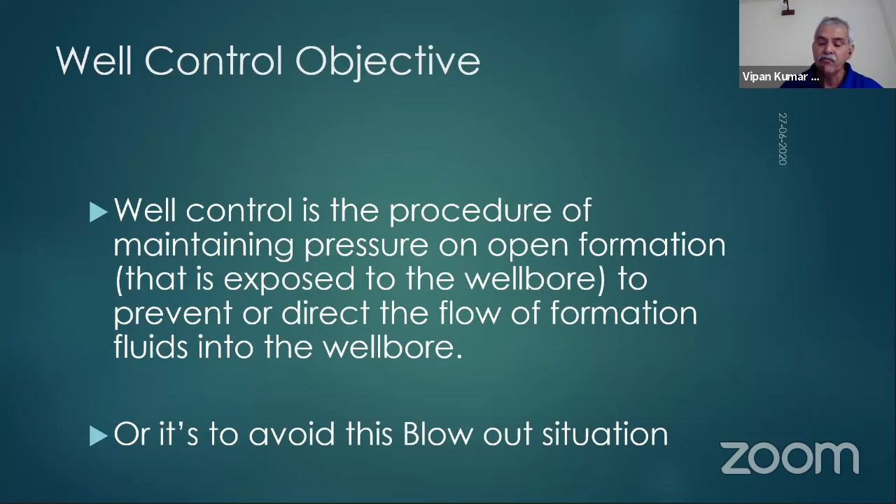Before I go into well control in detail, let us talk about well barriers. Why am I talking about well barriers in the beginning? Because if you see this particular case in Assam, what they were doing was actually a well intervention job. Much of you may not understand now, but just listen to what I'm saying. By the end of the program today, you'll be able to appreciate exactly what is happening there.

What was happening there was they had one zone active with BOP and wellhead installed on the well. They wanted to shift production from that particular target to some other object of interest. So what they did was put a cement plug on the object they didn't want production from. They put a cement plug there, and they had brine of the right weight in the well. So according to them, with brine in the well and a cement plug, they could go ahead and do some repair work on the wellhead.

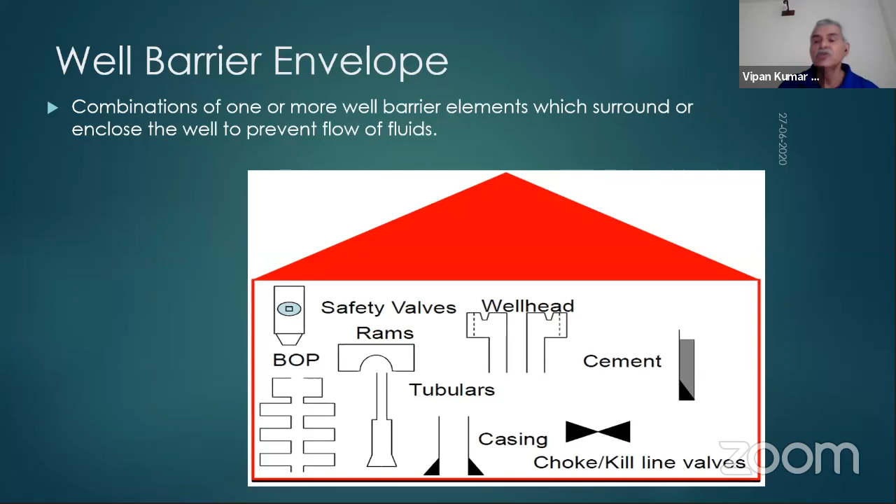So when we are drilling a formation, and as we drill further, we can encounter, particularly in exploratory wells, very high pressure zones. Now, when we are drilling, how will we encounter such high pressures? What will we do? Who will stop them? What stops them is the mud.

Other than doing the primary functions of taking the cuttings out of the well, cooling and lubricating the bit, suspending the cuttings when circulation is not happening, and giving corrosion resistance, these are all the work which the mud does. But also, very importantly, mud acts as a primary barrier.

Now, this mud, because of its hydrostatic head, doesn't allow the high pressures from the formations to come into the well. But this mud should be of the right mud weight. That is the point. So when we drill a well, from our graphs, from our pore pressure values, we should select the right mud weight so that we can effectively drill that well.

If the mud hydrostatic pressure in the well is more than the formation pressure, we are overbalanced, and that is what we should be. Our mud hydrostatic pressure should be more than the formation pressure, so that it can control formation fluid from coming in. This is an overbalance condition, and this is a wanted condition. It should be like that.

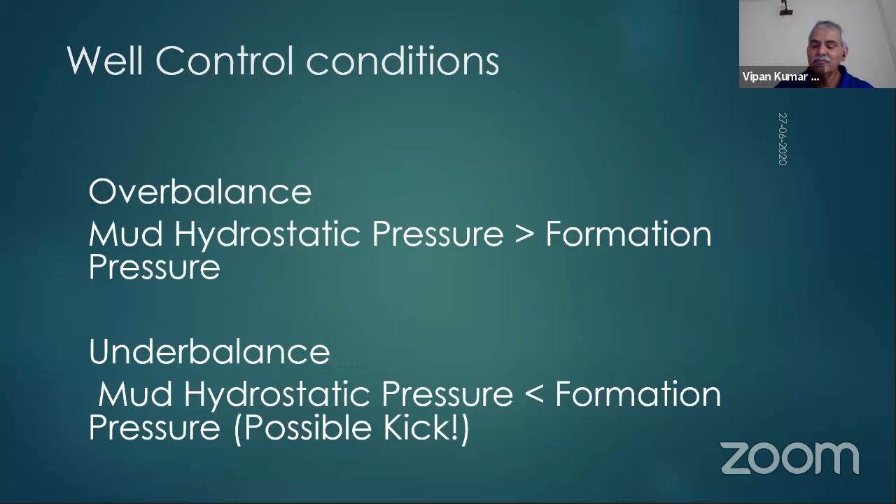Okay, once you have got a kick, suppose you have entered a high pressure zone. Suppose your prediction was that you are using, say, 15.8 ppg mud, that is what you anticipated. But suddenly you have come into a very, very high pressure, unexpected zone, which demands a much higher mud weight, which you were not anticipating. So naturally, some kick will come into the well.

Now, if the kick has come into the well, your next action will be to shut in the BOP. So now this BOP, which you will shut in when the kick comes, is your secondary well control. Primary was mud, which was handling everything. Somehow mud failed. Maybe the high pressure encountered was not anticipated, and your mud weight was less than required,

and formation fluids started entering the wellbore. Now formation fluids are entering the wellbore, the well is flowing. The action you should take, and people should be trained to take, is to close the BOP in as little time as possible. After the closure of the BOP, it becomes the secondary well control equipment acting on the well.

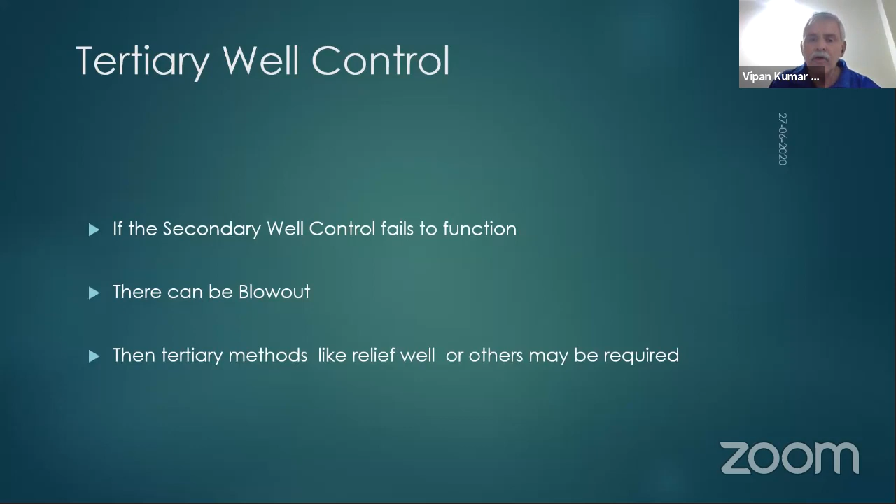Coming to our next slide. If formation fluid enters our borehole, that is called a kick, and a drilling engineer, when drilling, should use the right mud weight not to allow the kick to enter the well. If the kick enters, you have to use secondary means like the BOP to hold it. If everything fails, you can have a difficult situation like a blowout, which anybody should avoid.

People are trained on the rigs not to allow these things to happen. Now, a drilling engineer wants to drill overbalance, meaning he wants his mud weight hydrostatic head to be more than the formation pressure. That's what he wants, but sometimes he goes underbalance.

Why does he go underbalance? One reason is that he encounters a formation that is more pressurized than expected. A second reason is that the mud weight he's using may not be correct - there may be a measurement issue, or he might have pumped some pill or liquid with a lesser mud weight, or for some other reason the hydrostatic mud weight is reduced. I'll explain more about how reduction of hydrostatic pressure can happen later - there's a slide for that.

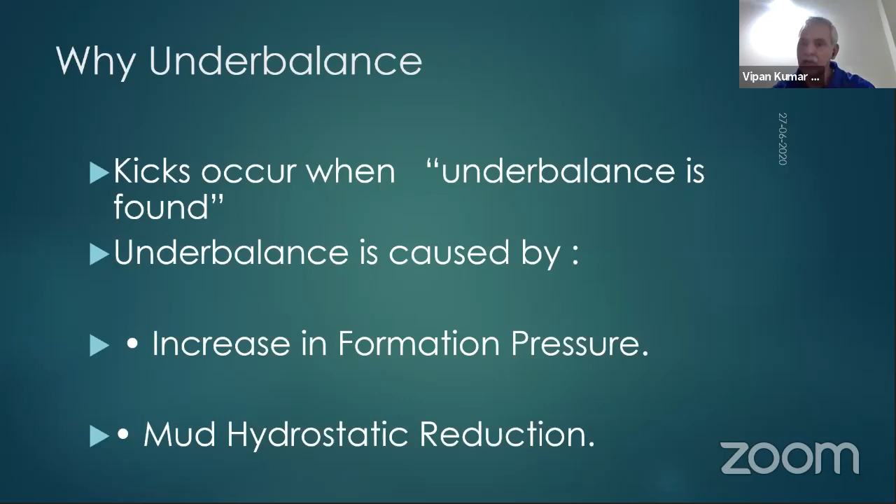Now, in the formation, there can be normal pressure, abnormal pressure, or subnormal pressure - three types. It is normal pressure if the formation pressure gradient increases between 0.433 to 0.465 psi per foot. This is actually a saline water gradient. Generally, in the reservoir, in the earth strata, there are porous spaces filled with saline water, and the normal pressure in the formation is due to the hydrostatic head of this saline water in the pores.

But sometimes there is an abnormality because of certain geological reasons, where pressure gradients in the formation are more than 0.465 psi per foot - this is called abnormal, because it is not merely the hydrostatic of the saline formation fluid, but something more. There is some abnormality somewhere, and we will see what these abnormalities are and how they happen.

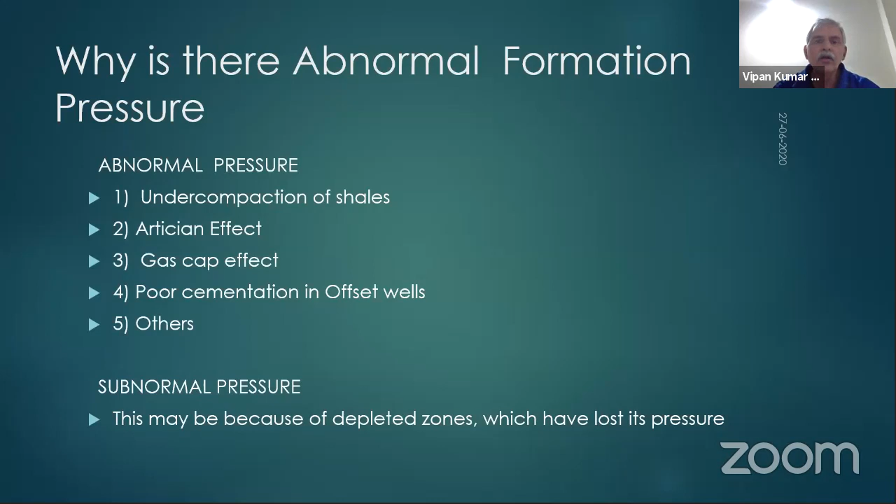Mud hydrostatic, which we use as a means to control the formation pressure, can be reduced if you are not controlling the mud weight properly. Actually, when you drill a well, you should be observing the mud weight where it is being pumped, before pumping, at the shale shaker, at different points. There should not be any mistake, and from time to time there should be monitoring of the mud weight. If that monitoring is not proper, you may be pumping less mud weight and creating a problem. So right monitoring of the mud weight at different places is very important. That is one of the reasons which may result in reduced mud weight, and finally reduced hydrostatic pressure, which may cause a kick.

And also there can be a reduced column. How can reduced column be there? Suppose you are drilling and you get a loss somewhere, the formation is very weak and a lot of mud goes into that, so the level in the wellbore falls, and the effective height of the mud column to create the hydrostatic head becomes less, and some other zone may kick. So if there is a loss in some zone, the fluid level will come down, and the net effective height will fall down, and another zone which may become active, you may get a kick. Because the hydrostatic pressure of the mud is mud weight multiplied by a constant multiplied by TVD, the mud column height. So the mud weight you are regulating, but this height will fall if there is a loss. The mud column will fall down, and some other zone may get activated. So we have to take care of all that.

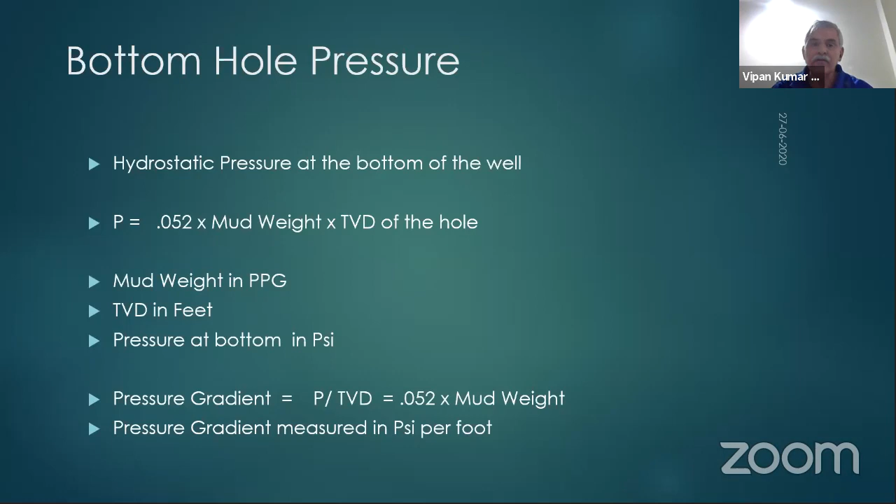So now, why does a kick happen? We are drilling, using mud as a primary well control, mud weight is correct, and drilling is in progress, everything smooth. The driller, drilling engineer, and his team are employed in different locations doing their respective jobs, and there is a bit change. The bit is worn, and the driller needs to pull out the bit. When the string is pulled out, if he does it fast, something called swabbing happens. If the bit is a little balled up with mud and swelled with some cuttings, and he pulls it up very fast, it acts like a piston, creating a swabbing effect, and the pressure below the bit will fall. Like a syringe, like a piston, the whole string, when pulled up, creates a suction effect below the bit, causing swabbing, and formation fluids can come in, resulting in a kick.

So that is how swabbing creates a kick. Or you may be having some gas in the well, and while circulating, those gas bubbles, as they come up to the surface, become bigger, and that may create an underbalance, causing your well to start kicking. Or there is some gas bubble which you pulled in while swabbing. You might have swabbed, and then you wanted to go down.

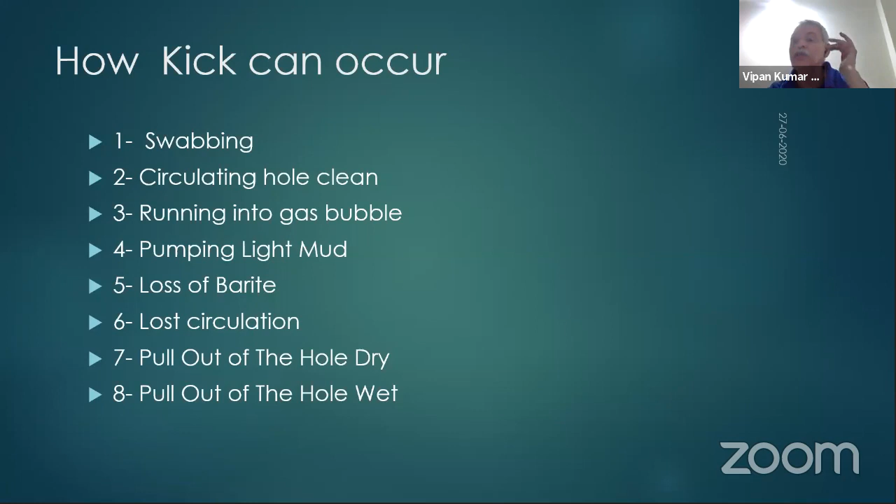So these are different reasons. In spite of the formation pressures not being very high, there are operational reasons which a driller or drilling engineer team need to keep in check to ensure that a well control situation doesn't occur.

Now, how can a kick be prevented? We have talked a great deal about that, that we should be monitoring all the monitors which we have, our pumps should be working properly, and mud should be in good condition. We should keep the hole always full, monitor for any loss circulation zone, and catch that before it catches us. We should note it down and address it before it creates any problems. So all this type of monitoring should be there.

So let us see, suppose we are drilling an exploratory well. In an exploratory well, there are different parameters. You don't know what the pressure is down there, it is expected, it is anticipated. There is pore pressure data provided to you, which may be reliable, or may not be very accurate, since it's a wildcat exploratory well. So in that, you may encounter a very high pressure, and what care a driller must take for such wells to be drilled, and what warnings a driller will get from the formation that there may be a difficult situation, is what we will look at.

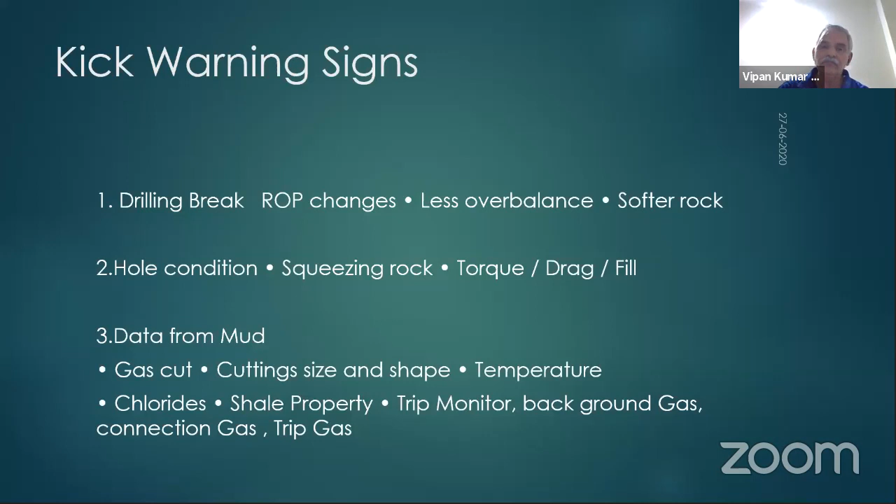So this is a review of the same thing, the care which the driller needs to take to see which are the warning signs coming, and to be on his toes to see if there is a kick, to handle that. But if there are positive signs, suppose he's drilling and suddenly...

That pit level is increasing, like he's drilling in the loop. Because it is a total loop, the level of the pit should remain the same. But he is drilling in the loop and suddenly he finds that the pit's level, the liquid level in the pit, is increasing. So that is a warning sign for him, a positive sign that something has gone wrong at the bottom.

If he's drilling and the return flow, which should be coming steady, like he's pumping at some rate, say 350 gallons per minute, and return is coming at the same steady rate, but suddenly there is an increase in that return rate, that should be a very positive sign that something is going wrong.

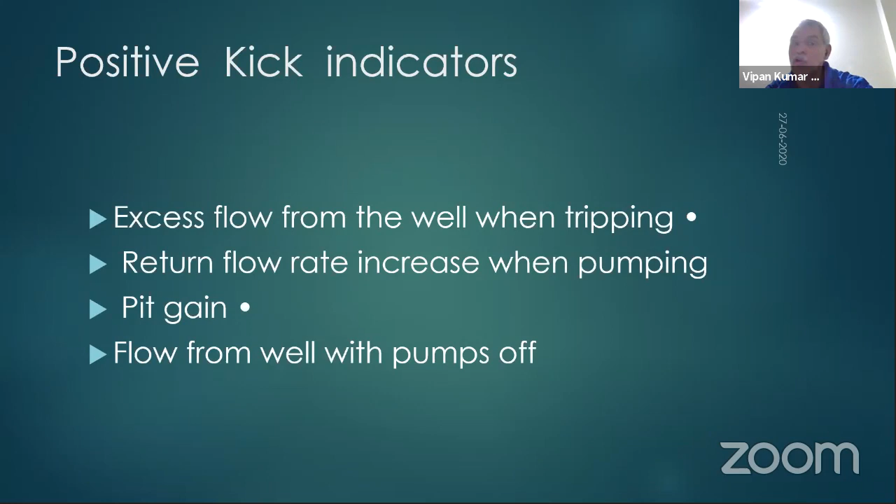So the BOP system is an equipment which will close around the drill pipe or whatever tubular is across it in a very less time, and it has a control system that uses minimum time, like 30 seconds or 45 seconds, for that BOP to close.

Once the well was flowing, it was unstable, and the primary barrier of the mud was threatened. Once the primary barrier mud is threatened by encountering a high pressure zone, the well flows - it is called a kick. Once that happens, the secondary system should act and come into action, and the BOP should be closed immediately, as soon as possible, within say 2, 3, 4 minutes, and the well should be closed. So our secondary well control system is in operation and the well is in a stabilized condition.

Now I would like to show you some videos so that you can get a clearer sense of this.

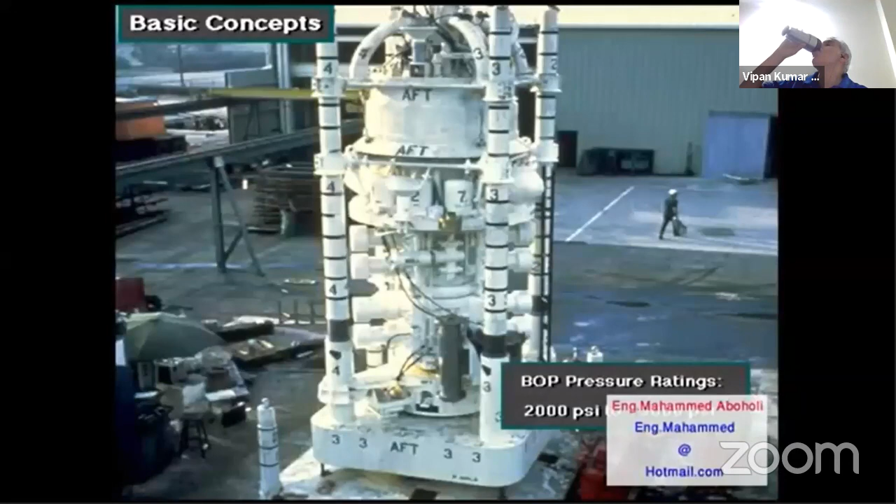The blowout preventer, or BOP stack, consists of several large valves stacked on top of each other. These valves are called blowout preventers. Manufacturers rate BOP stacks to work against pressure as low as 2,000 pounds per square inch (PSI) and as high as 15,000 PSI, about 14,000 to over 100,000 kilopascals.

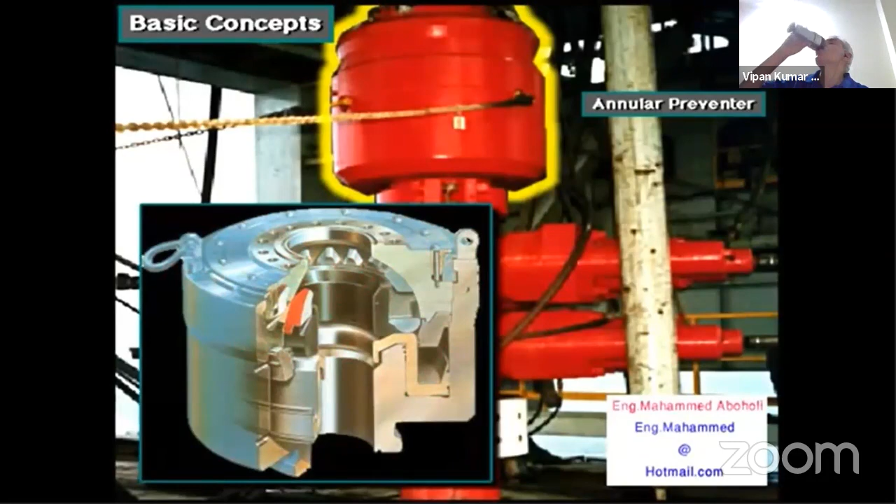Rigs usually have two kinds of preventers. On top is an annular preventer, called that because it surrounds the top of the well bore in the shape of a ring, or annulus. Below the annular preventer are ram preventers, whose shut-off valves close by forcing or ramming themselves together.

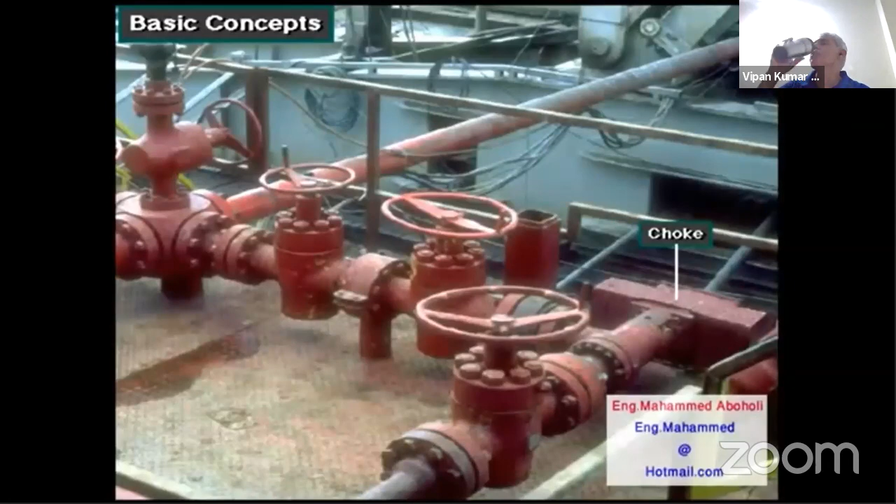The choke line is a line through which well fluids flow to the choke manifold when the preventers are closed. Even though the preventer shuts in the well, the crew must have a way to circulate the kick and mud out of the well. Mud and formation fluids exit through the choke line to the choke manifold, made up of special piping and valves. The most important valve is the choke, which has an adjustable opening.

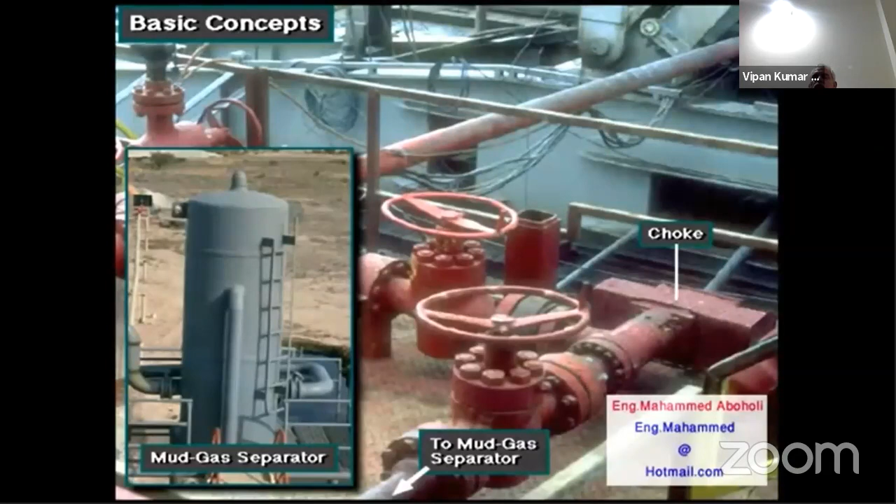Crew members circulate the kick through the choke to keep back pressure on the well. Keeping the right amount of back pressure prevents more kick fluids from entering the well. At the same time, they can remove the kick and put in heavier mud to kill the well, regaining control of it. The well fluids leave the choke manifold and go to a mud gas separator, which separates the mud from the gas in the kick. The clean mud goes back to the tanks, and the gas is flared or burned a safe distance away.

When the well takes a kick and the BOPs are open, well fluids force mud to flow up the well bore and into the BOP stack. When the driller closes the annular BOP, flow stops. Usually, drillers close the annular BOP first. The closed annular BOP diverts the flow to the choke line, which goes to the choke manifold. The driller can open a valve on the choke line and safely circulate the kick out of the well through the choke manifold.

Here's an annular preventer. An annular BOP closes on drill pipe, drill collars, or any shape of tubular in the well. It can also close on open hole, a hole with no tubulars in it at all. It's usually the first preventer used to close in the well.

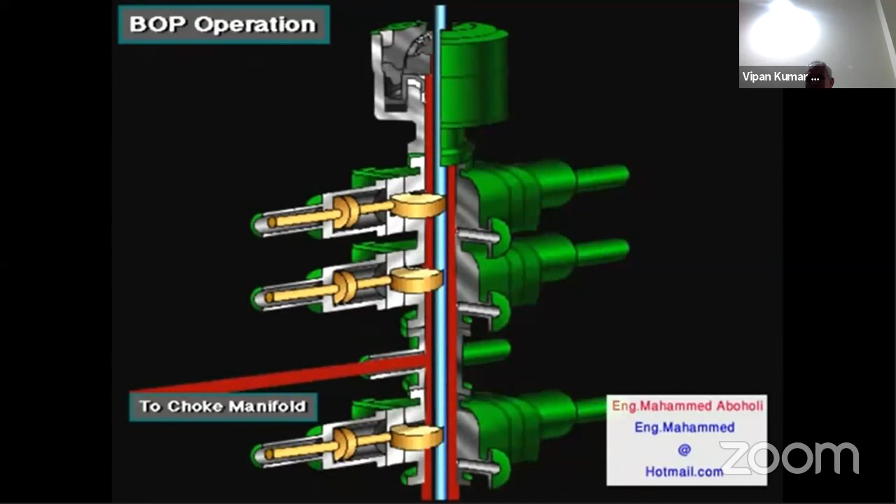Here are the types of ram preventers: pipe rams, blind rams, blind shear rams, and variable bore rams. Pipe rams are used when there is drill pipe in the BOP stack; they fit around the pipe, closing off the annulus. Pipe rams back up the annular preventer, so in the unlikely event the annular BOP failed, crew members could shut the pipe rams to seal the well. Some pipe ram preventers are also used to hang off or suspend the drill string on subsea BOPs.

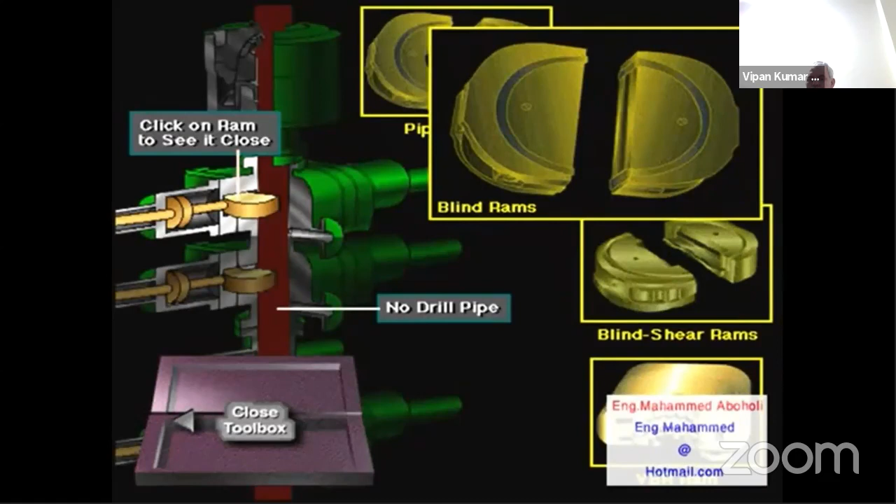Blind rams are designed to seal an open hole. If the annular BOP fails and there is no pipe in the hole, the crew could seal the well by closing the blind rams. Blind shear rams are designed with blades that cut through the drill pipe and then seal the open hole. They are used in extreme emergencies, like when an offshore floating rig has to move off a well because of a hurricane or other emergency—allowing them to cut the pipe, seal the hole, and then move the rig a safe distance away.

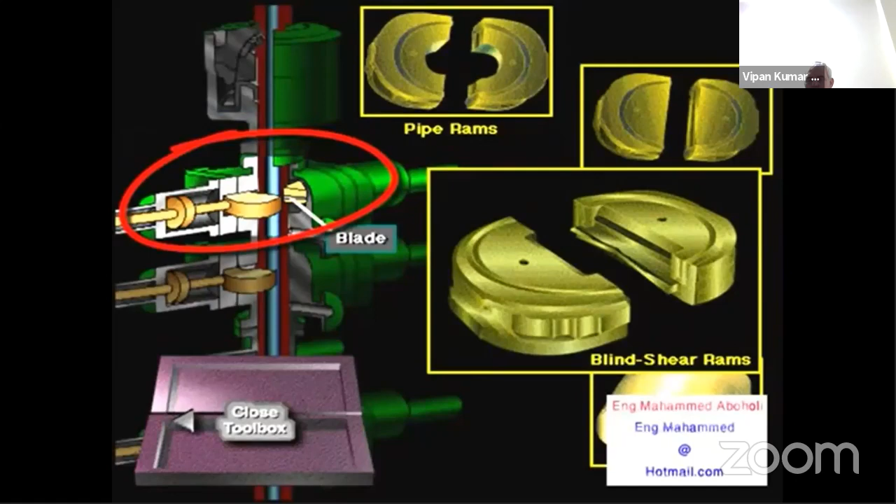Variable bore rams, or VBR, are special pipe rams that can close over a range of pipe sizes, such as 5-inch diameter to 3-inch diameter.

Okay, Nikhil, they could see the video? Yeah, it's coming, sir. Okay. Okay, so video was okay. Yeah, so video is completed, sir.

All right, so this video explained how the BOP system is, how the choke manifold system is, what the mud gas separator is, and how the total system of BOP equipment works, right? Now I will also go a little more in detail.

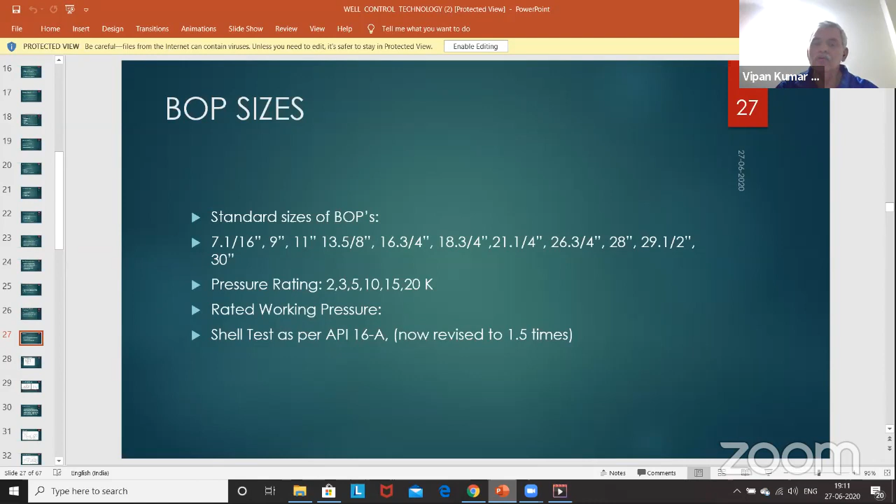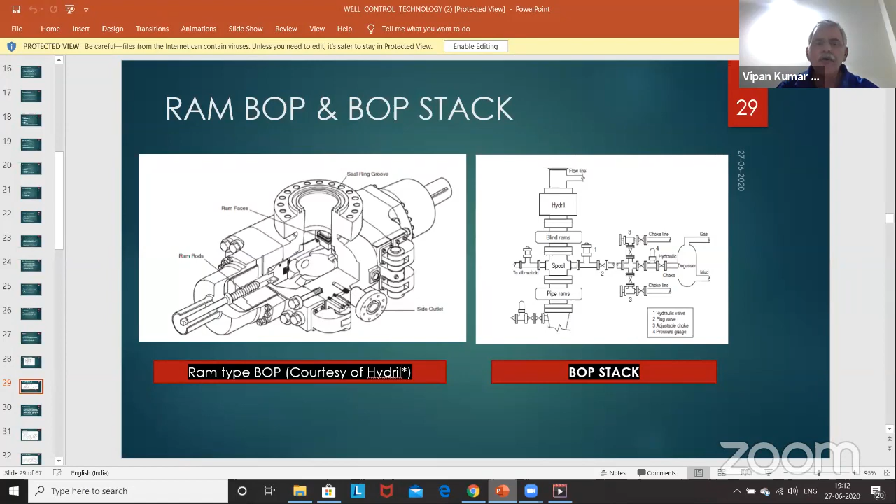The annular type of preventer has a rubber element which is moved by a piston, energized by hydraulic fluid from a control panel. There is a BOP control panel which has high pressure nitrogen cylinders, and they push the fluid to the annular BOP. Once that high pressure fluid enters the annular BOP from the unit, it will activate the BOP. So there is a hydraulic design to activate the annular BOP very fast.

Inside the BOP, there is a rubber element and a piston, and that piston is actuated by hydraulic fluid connected to a pressurized system. RAM BOP is something like that. There are rams with packing seals of different types, and it can close on a drill pipe.

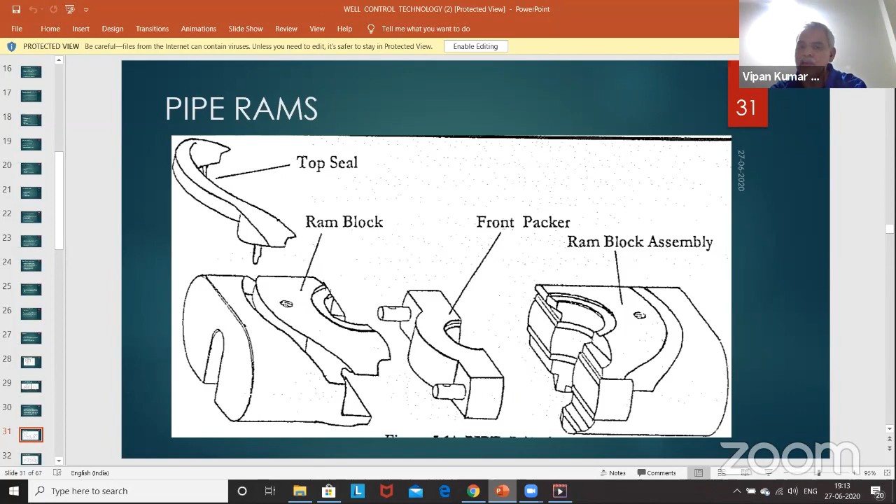Blind shear ram: if there is no pipe in the well, this blind ram can close on the well, or even if there is a pipe in the well, it can shear it - there is a blade there that can shear the pipe and close the well. If there is a pipe in the well, this blade will shear that pipe, and then finally go against one another and it can close also. It can cut and close both things. So it is called blind shear ram.

Ram preventer - there are many ram preventers in a BOP stack. There may be an upper pipe ram, 5-inch pipe ram. There may be a lower 5-inch pipe ram. There may be a variable pipe ram which can close on 5-inch or 3.5-inch drill pipe. There may be a shear ram, or a blind shear ram, the one I showed you, which can shear and then blind also. Or when running a casing, you can put a casing ram. So there are different types of rams in the BOP stack.

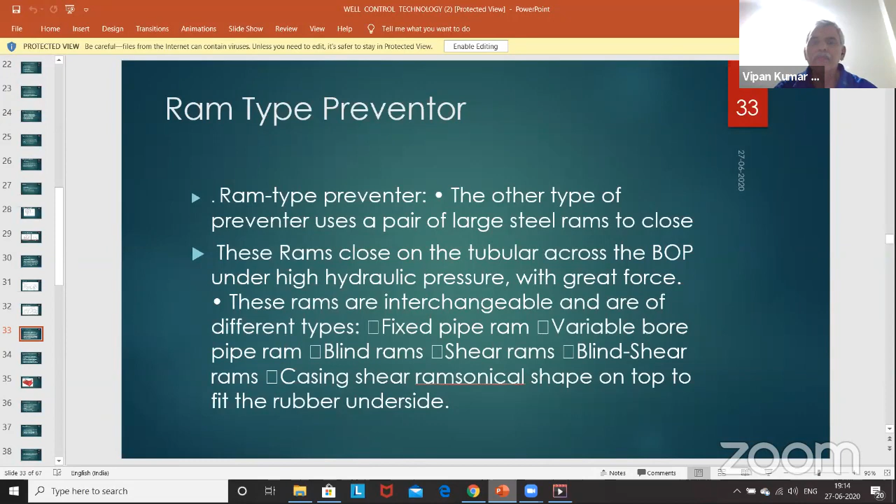When BOP is closed, when we have got a kick in the well and BOP is closed, our job is that the formation fluids which have come into the well should be circulated out actively, right? So when we circulate those formation fluids which we don't want, we want to circulate them out of the well. At that time we need to ensure that while circulating, the bottom hole pressure...

We have to use the choke, which has a variable range to control and create a restriction so that there is back pressure created at the choke. That back pressure will act in the well, and with that control we can create a pressure at the bottom equal to the formation pressure, ensuring that when we are killing the well, it doesn't flow further. So the job of the choke is to restrict the flow when we are circulating in a way that creates back pressure, which will be added to the hydrostatic pressure of the mud, acting on the formation pressure, not allowing it to exceed, and creating a bottom hole pressure more than the formation pressure.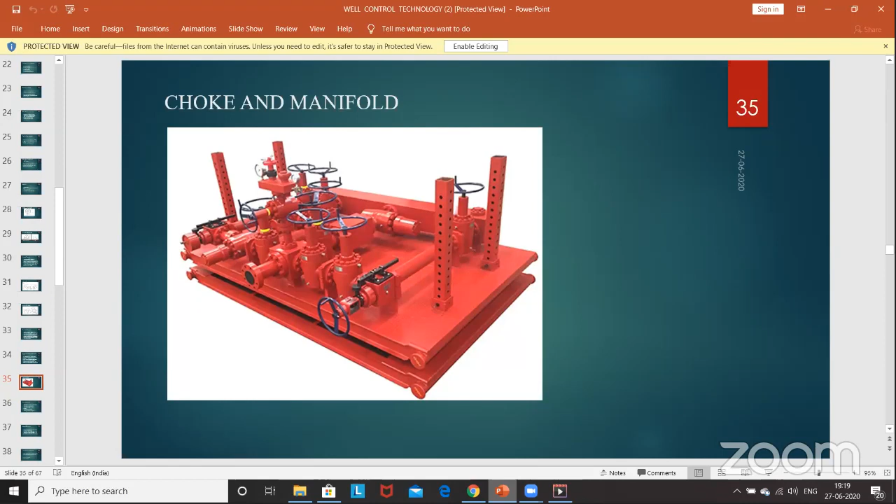Choke and manifold, sir. Okay, choke. Alright, so choke manifold has choke there. Choke is equipment which has an arrangement to vary the restriction. It has a restriction in it. In the choke, there is a restriction, and that restriction can be varied using a spindle. You can change the restriction, you can increase it, you can decrease it.

Now if the well, you are circulating the well, and it is being passed, BOP is closed, well is shut in, BOP is closed, and you are circulating with the drilling pumps, and the mud is going inside the drill pipe to the bottom, and outside it is coming in the annulus, and then it is coming to the BOP, and from the BOP it is diverted to the choke manifold. It will come to the choke, and now the fluid is flowing through the choke, and I will control the choke's restriction, and that will create a back pressure there, and that back pressure will add to the hydrostatic pressure at the bottom.

It will control the bottom hole pressure in the well to be more than the formation pressure. So we are to very methodologically control the choke so that we create enough back pressure in the choke, so that it can add up and create the bottom hole pressure while killing the well, always more than the formation pressure, and doesn't allow any further kick to come in. So by regulating it, I will create a pressure in the annular profile in the annulus of the well. I will increase the pressure in the annulus of the well by restricting the flow with the choke, and that will keep the bottom hole pressure more than the formation pressure. That is the objective. When I do the final procedure of well control, I'll go again into it, and if not clear now, it will be clear then. So I'll explain it again when I do that.

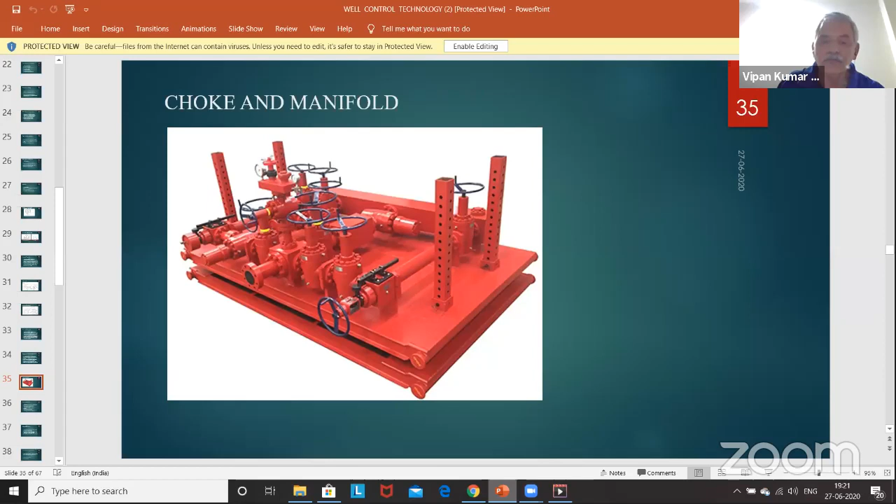So a BOP control system is a system which has pressurized nitrogen available in the system. Why is this important? Suppose on the rig there is a power failure. Now there is a kick coming in the well, and power failure is there. What to do now? So there should be some system which can get activated even if the power failure is there. So the energy stored in the compressed nitrogen can be used to push the hydraulic fluid into the BOP and close the BOP. This is the main function of the BOP control system. In case of power failure, it should be able to close the BOP using the compressed nitrogen which it has in the system. Number one.

Number two is that this system should be charged enough so that it should close the BOP in a very short time, say in 30 seconds, or if the bigger BOP is there, in 45 seconds. So in such a short time, it should close the BOP. That is the second very important function of the BOP control system. So these are the two main functions which the BOP control system performs.

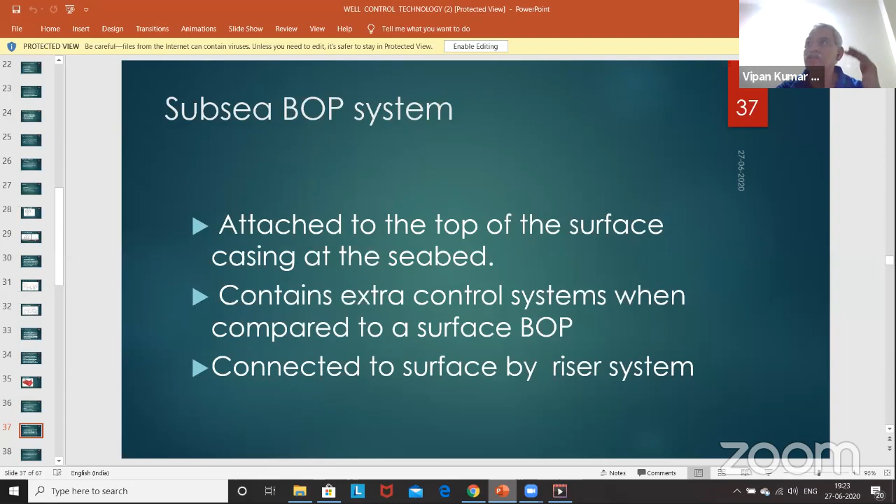In subsea BOP system, the BOP is at the seabed, and the control system is also a little more complicated than the land rig or jackup rig. And it has, from the BOP which is at the seabed, a riser coming to the floating vessel, which can be a drill ship or semi-submersible. So I'll not go much into that. Subsea BOP system is a little different than the jackup system or land system.

We also have equipment like the pit volume totalizer. If there is a pit gain, this monitoring system tells us how the pits are behaving while drilling. If pit levels go up or down, we can notice and take necessary action, as that should be the sign of a kick.

So these are the equipments used for detection purposes. The mud gas separator: suppose gas has entered the well and we are circulating it out in a controlled way. When it comes out, the gas and mud combination passes through this separator where the mud and gas are separated, and gas can be vented to a safe place while mud can be reused. This is one of the important well control equipment used in well control procedures.

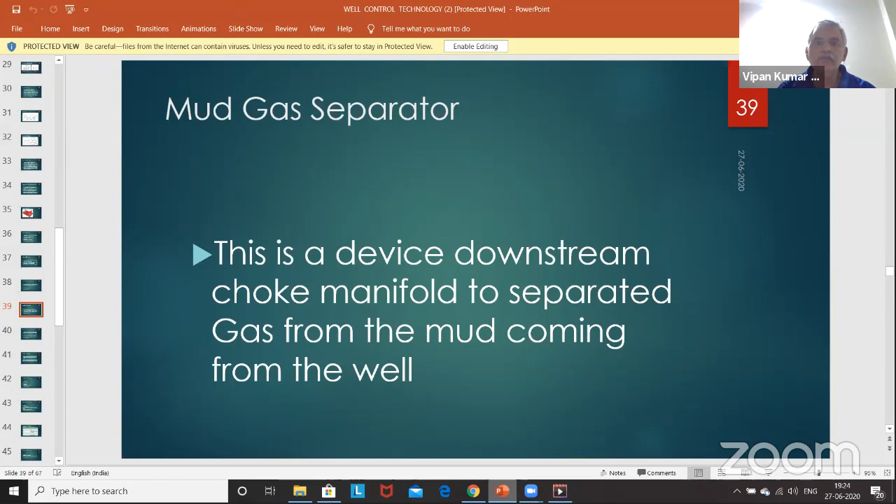I'm just skipping this. The flow indicator and pit volume totalizer I think I have already mentioned, so I'm going fast on it.

When we get a kick in the well and the well has started flowing, the drilling engineer notices that flow is there, the return flow has become more, and indicators show that some influx from the formation is entering the wellbore. So what should be our action? Our action is to shut in the BOP.

To shut in the BOP there are two main procedures. One is the hard shut-in procedure. Some people ask this in interviews. The hard shut-in procedure is: first you stop the rotation, stop drilling, pick up your Kelly, that hexagonal pipe used to drill, or the top drive. Pick it up, stop the pump, and then watch the well to see if it's flowing or not, and then close the BOP.

You should close the BOP as early as possible: stop rotating, pick up the Kelly to the right position, stop the pump, then close the BOP. After closing the BOP, you open the side outlet valve, which I showed you in the BOP stack, and then you can record the pressures. This is the hard shut-in procedure, in which the BOP is closed in a minimum possible time.

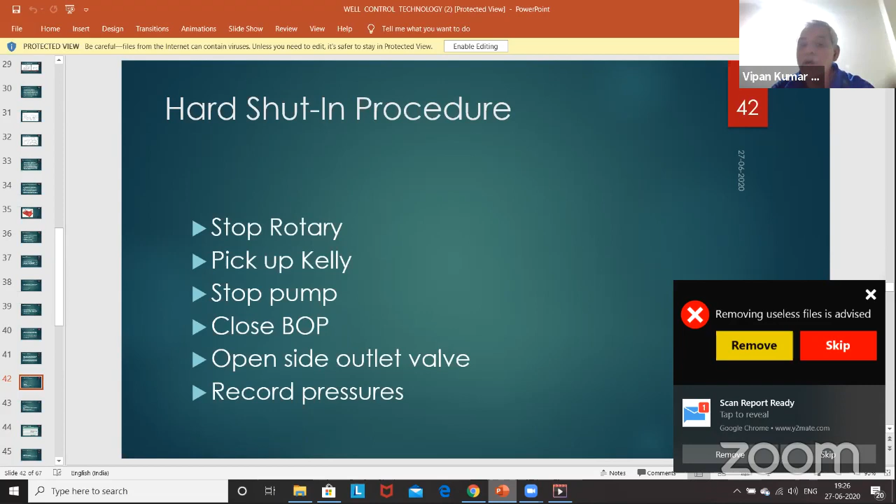But if the formations are very fragile and you're afraid that immediately shutting in the BOP can create an impact that may fracture those fragile formations, then you can follow a soft shut-in procedure. Most companies nowadays follow the hard shut-in procedure because it takes minimum time to close the well and invites minimum kick into the well, since you have closed in minimum time.

So most companies go for hard shut-in, but some companies, for certain formations, may go for soft shut-in, where the procedure is: stop rotating, lift Kelly, shut down the pump. In this, you open the side outlet first, then close the BOP, and finally close the choke. So the procedure is: stop rotating, pick up Kelly, space out, shut down the pump. After this, don't close the BOP yet, open the side outlet while the choke is already open, then close the BOP, and finally close the choke and record the pressure. This takes a little more time, but depending on company policy or fragile formations, some companies go for soft shut-in. Mostly 90% of companies go for hard shut-in.

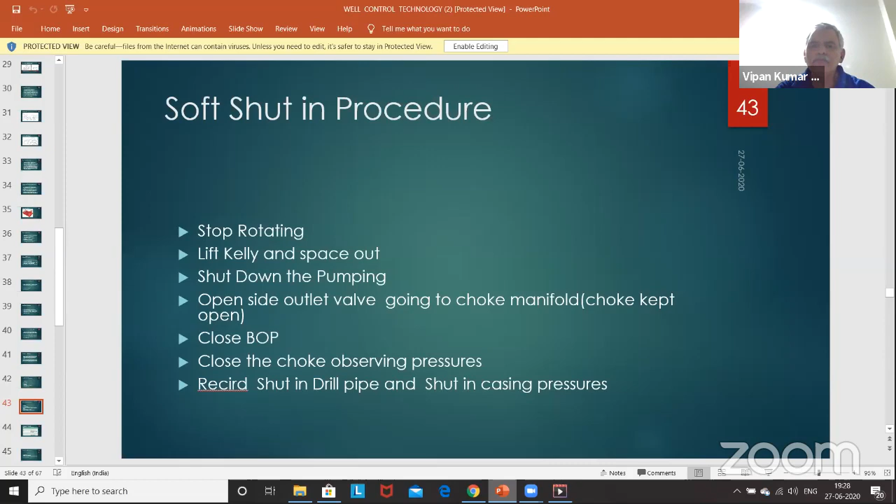So what is the well control procedure? First, detect a kick from the detecting system, from your monitors and instruments. Once the kick is detected, immediately close the valve, close the BOP. Then there are two jobs to be done. Once the BOP is closed, record the pressures - how much pressure on the drill pipe, how much pressure in the casing or annulus - and record what is the depth at that particular time.

Then there are two jobs a drilling engineer does after closing the BOP. One is to remove the influx which has already come into the well. Number two, a right type of mud that will be able to take care of the high pressure we have encountered, which is called kill mud, needs to be transferred into the well.

These two jobs we've done: first, detecting a kick; second, closing the well BOP. Number three, circulating out the formation fluid which has come into the well. Number four, pumping in the required mud weight, called kill mud, into the well, so that the well has the kill mud appropriate for the formation encountered. After ensuring the kill mud is in the well and of appropriate weight, you can open the BOP and start drilling further, and the well is safe. This is the procedure a drilling engineer follows when he encounters a kick situation.

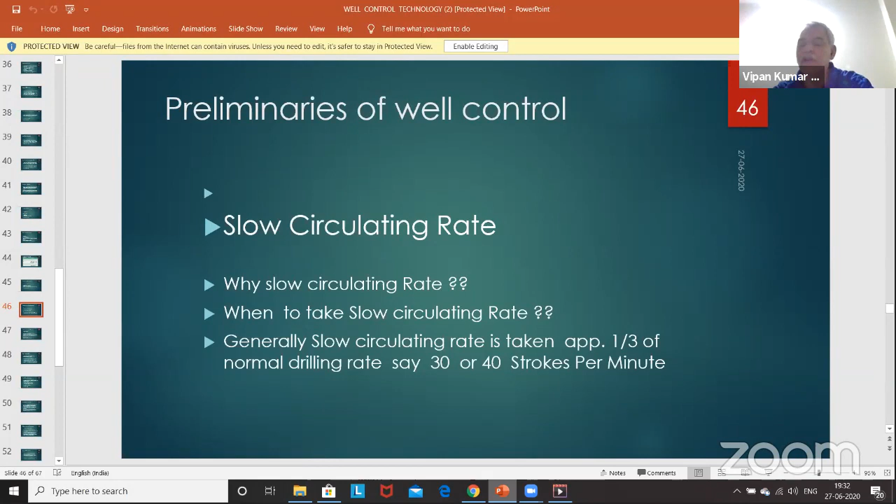Second thing: before you start, say you've lowered the 13 3/8 inch intermediate casing, and now you want to start drilling for the final productive zone. Before drilling for the productive zone, you should test how strong your formation is. Why? Because when you circulate out the influx you get later, you should ensure your formation is strong enough to bear the pressures that come when killing the kick. That is why the leak off test is performed well ahead. So these are the preliminaries: slow circulation rate and leak off test for formation strength. These are what a drilling engineer does before encountering any difficult situation, and this data helps him control the drilling situation most effectively.

Okay, so we have got a kick. We have closed the BOP.

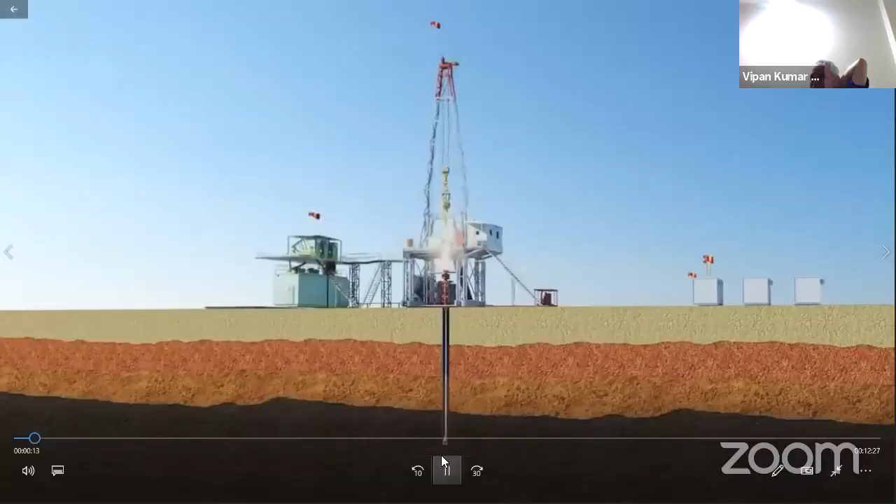Welcome to the ADCO Learning from Incidents series. Well control and blowout prevention. We will be sharing with you some information on well control during drilling, the various systems put in place to control a well and prevent a blowout incident from occurring. We will also review the main reasons behind some of ADCO's well control incidents which were handled successfully.

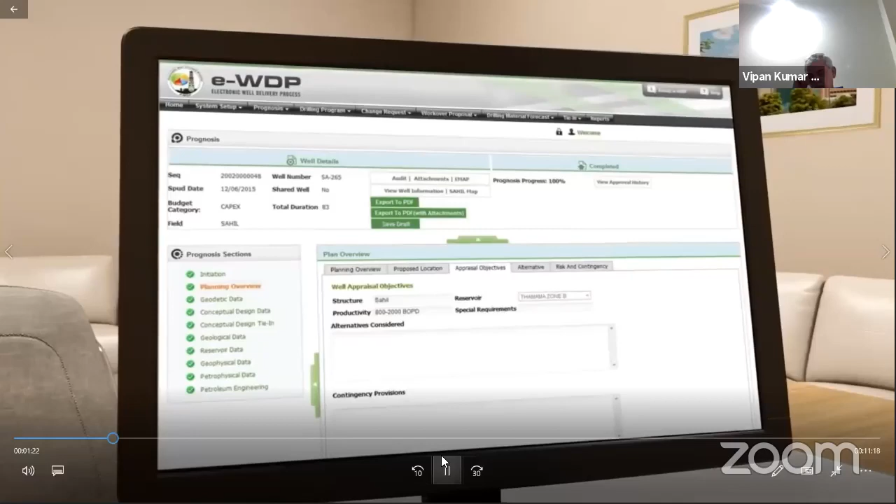Prior to the preparation of the drilling program, the asset development team submits the final well prognosis to the drilling team. The well prognosis is initiated by the petroleum engineer. The reservoir engineer then makes a planning overview and provides the required formation pressures and temperatures. Then the following data is completed: geodetic data, conceptual data, geological data, reservoir data, geophysical data, and petrophysical data. Once all the data is entered, the well prognosis will be approved by the Reservoir Operations Asset Team Leader and will be published in the ADCO system.

Let's begin by explaining well control.

While drilling, it is essential to perform activities in a safe way, which will prevent uncontrolled flow of formation fluids and gases from the reservoir to the wellbore and surface surroundings. This is called well control.

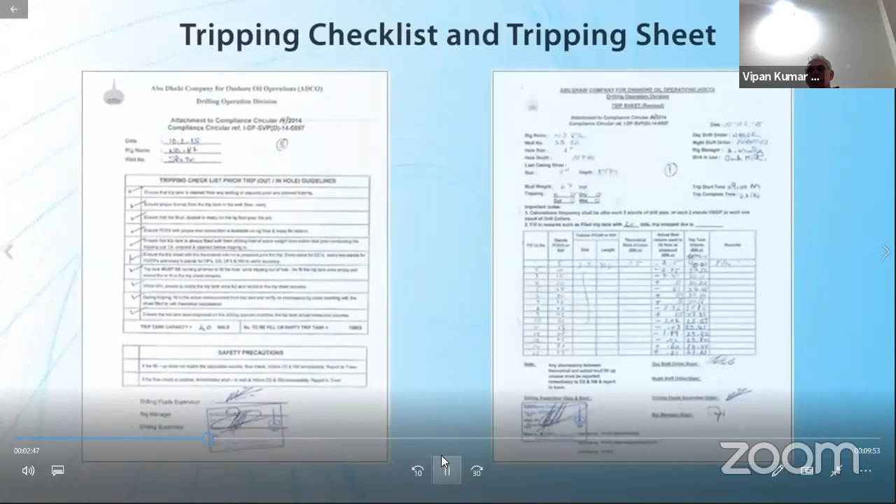This includes measures, practices, procedures, and equipment for workover and completion, as well as the installation, repair, maintenance, and operation of surface well control equipment.

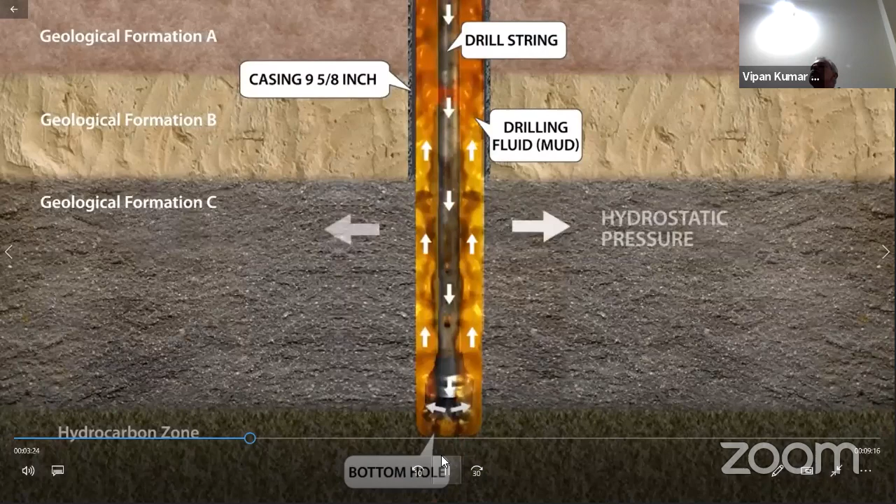It also consists of well control barriers, which are divided into two groups, primary and secondary barriers. The primary well control barrier is the fluid column hydrostatic pressure, referred to as wellbore pressure, that provides overbalance against the formation pressure. This column must be monitored and maintained during drilling and tripping to prevent formation fluids from entering into the wellbore.

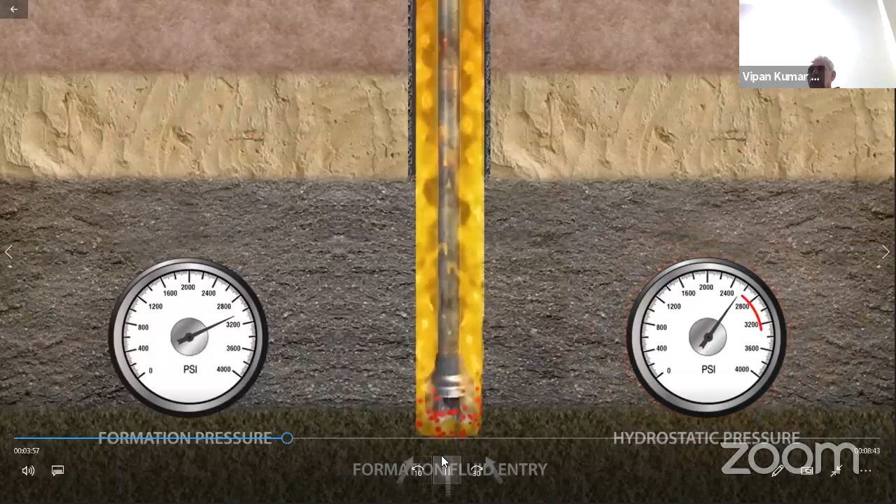During drilling, if the fluid column is not maintained with adequate mud density, making the formation pressure more than the hydrostatic pressure, formation fluids will find a way into the wellbore and a kick will occur. In this case, the well must be secured and killed.

There are other cases when a kick can occur. Let's review some of them. While tripping, if there is a failure to keep the hole full of mud to maintain adequate hydrostatic head, then the hydrostatic pressure will be less than the formation pressure, inducing a kick.

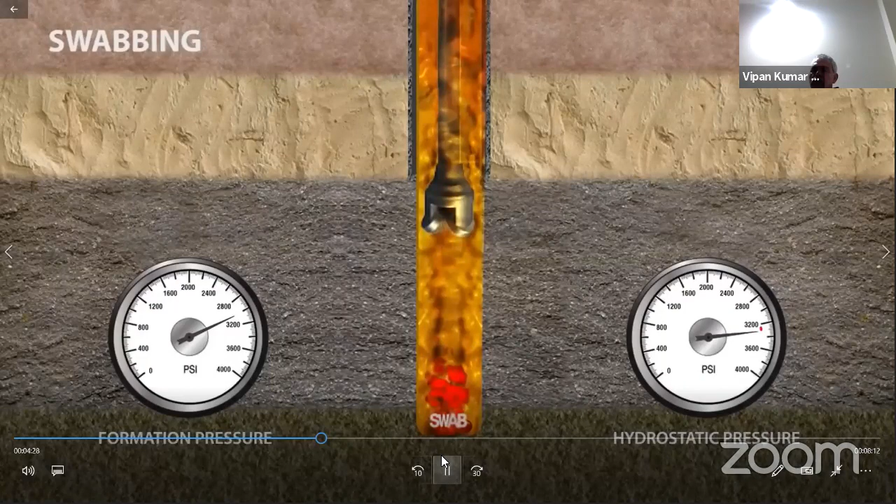Swabbing while pulling out of a hole too fast can produce a suction effect, resulting in a decrease in the bottom hole pressure, large enough to allow formation fluids to enter the wellbore, creating a kick.

When drilling takes place too fast and into depleted reservoirs without proper reinforcement, it can lead to cracking in the walls and thus losing fluids into the formation, inducing a kick.

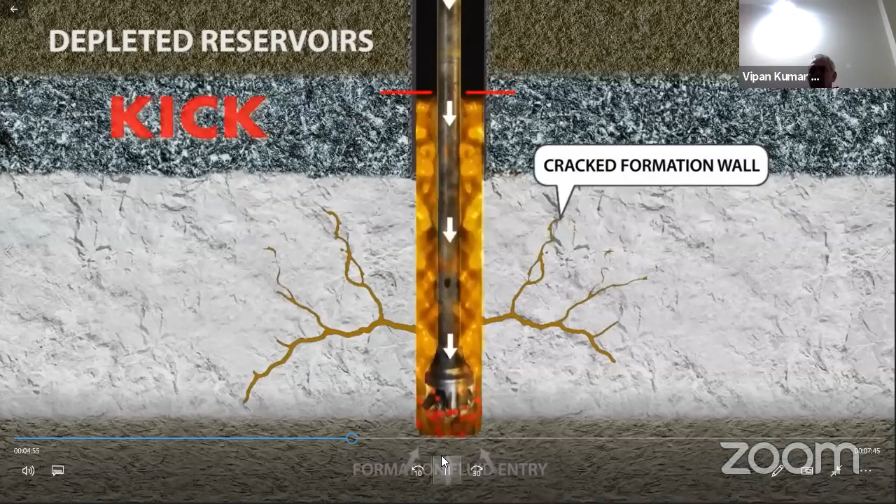Once a kick is detected, the secondary well control barrier, blowout preventer, BOP, must be activated immediately by the driller to secure and shut the well for killing operations.

This is done by closing the BOP using one of the BOP control panels, one situated on the rig floor and the second situated in the Koomey unit.

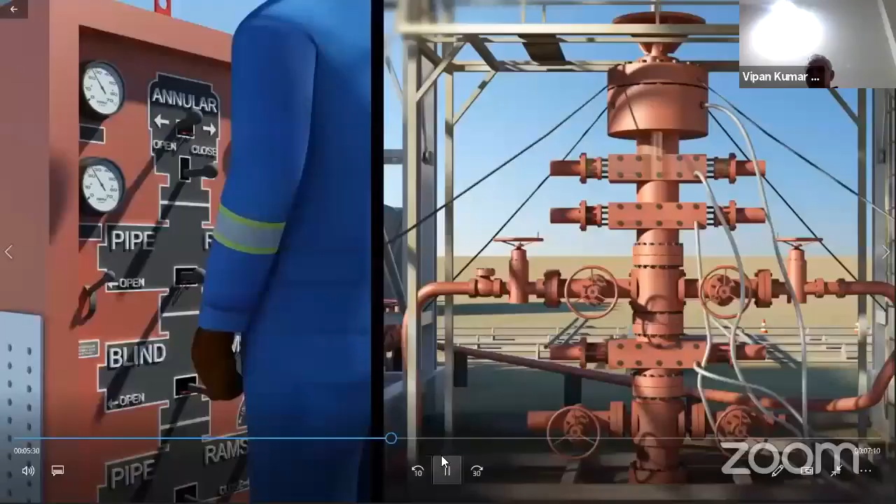The driller will shut in the blowout preventer to stop the flow of formation fluids out of the wellbore. Then he will activate the alarm and notify ADCO drilling supervisor and rig manager.

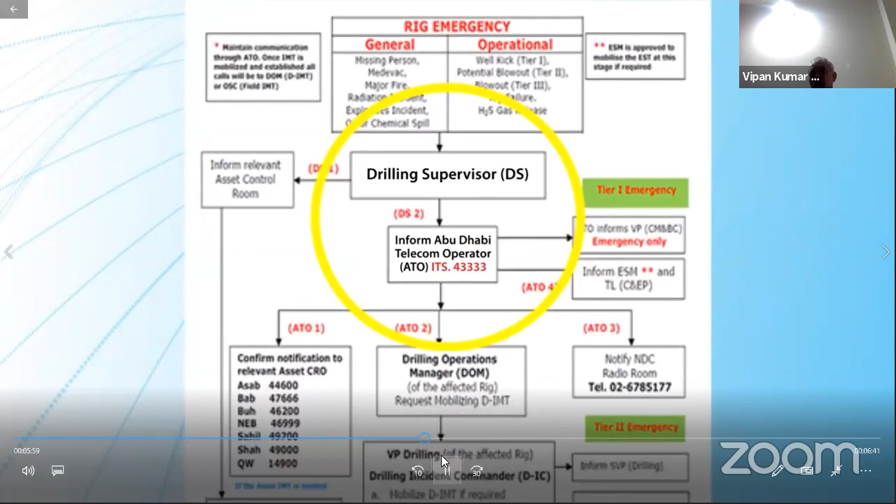Meanwhile, at the rig site, the on-scene commander, ADCO drilling supervisor, will notify Abu Dhabi telecom operator and relevant assets control room and raise emergency tier 1, which activates appropriate emergency response teams.

Unnecessary crew will be evacuated to the nearest assembly point. The next step will be to monitor the shut-in drill pipe and the shut-in casing pressure gauges.

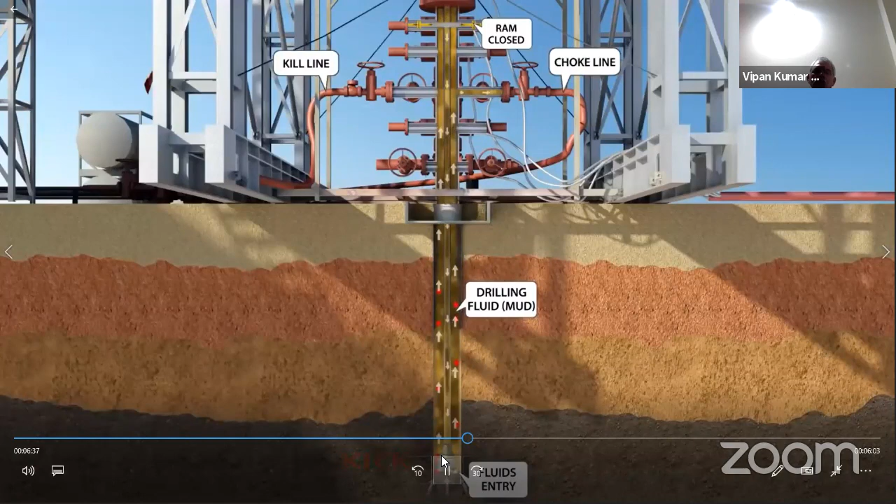The kick will be circulated out of the wellbore using the driller method, first cycle by pumping drilling fluid down the string and getting returns from the annulus through the choke line to the choke manifold, and the poor boy degasser, and toxic gases will be flared. Once the kick is out, the well will be shut in.

Then, the well will be killed with weighted mud by circulating the kill fluid until both the drill pipe and casing pressures reach zero. If all of the well control barriers failed, such as human barriers, BOP equipment barriers, and system barriers, and the BOP leaked while circulating the kick out, this could lead to uncontrolled flow of formation fluids

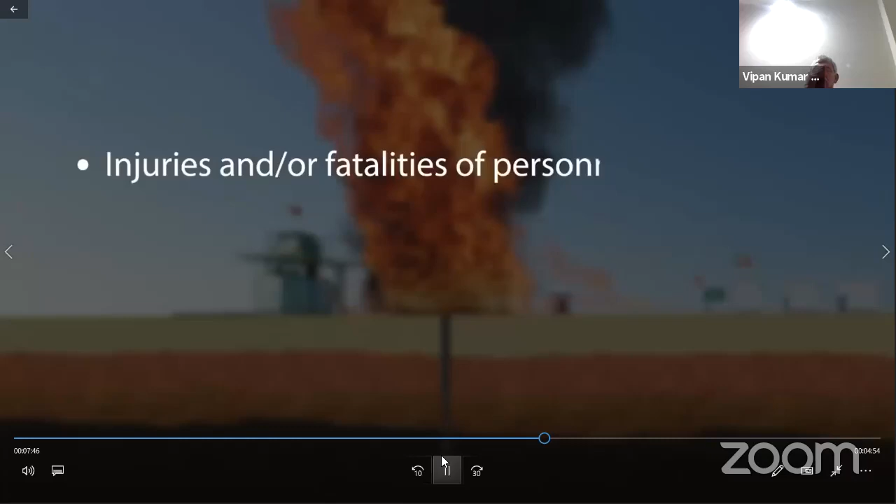and possibly a blowout. A blowout has massive catastrophic consequences, such as injuries and/or fatalities of personnel, release of toxic gases, pollution of the environment, asset damage, and damage of ADCO's image and reputation.

ADCO strives to create a safe and incident-free working environment for all. This is why strong well-control integrity assurance systems have been put in place. These include policies, standards, procedures, and people competency.

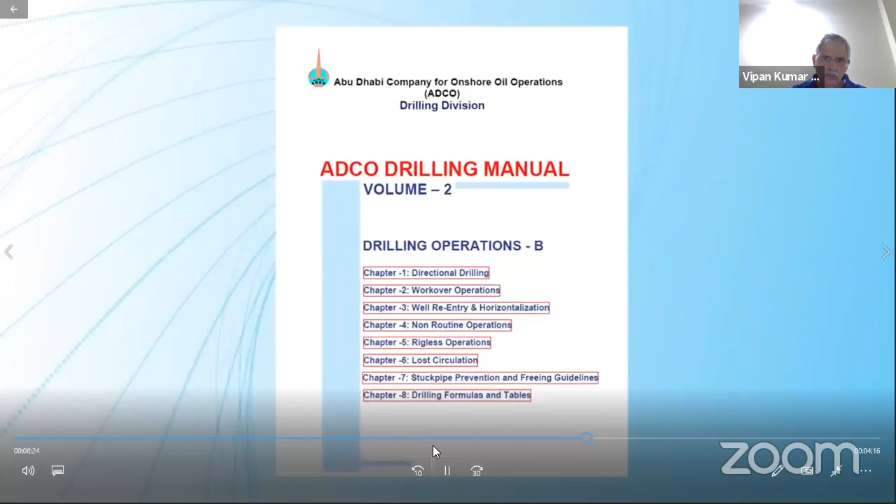Despite all of this, ADCO has experienced several well-control incidents, which have been managed and controlled successfully, preventing a blowout.

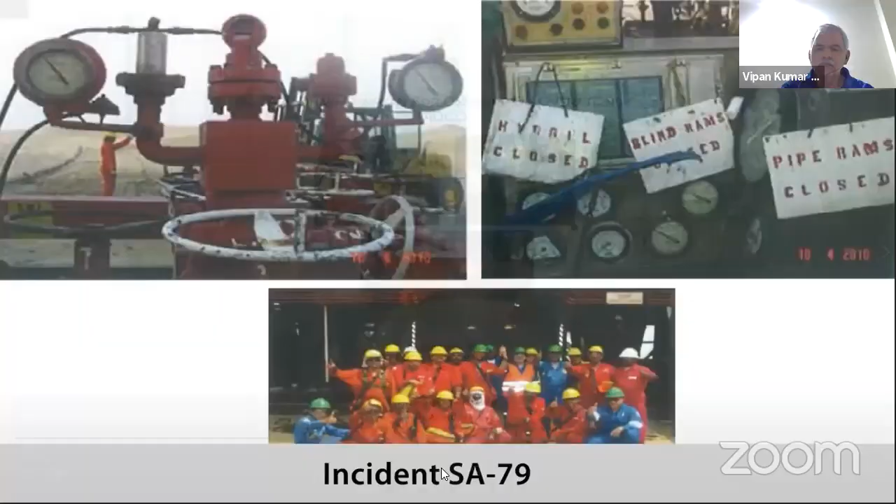After sharing with you the primary and secondary well control barriers, we will now share with you some of the main causes behind ADCO's major well control incidents.

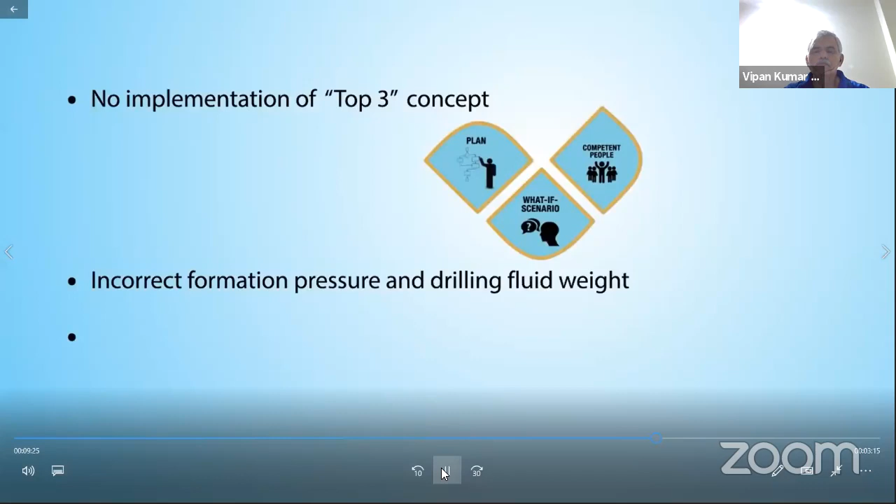No implementation of top 3 concept, plan, what if, competent people, incorrect formation pressure and drilling fluid weight. Failure to implement management of change procedure whenever there are changes. Failure to maintain BOP equipment.

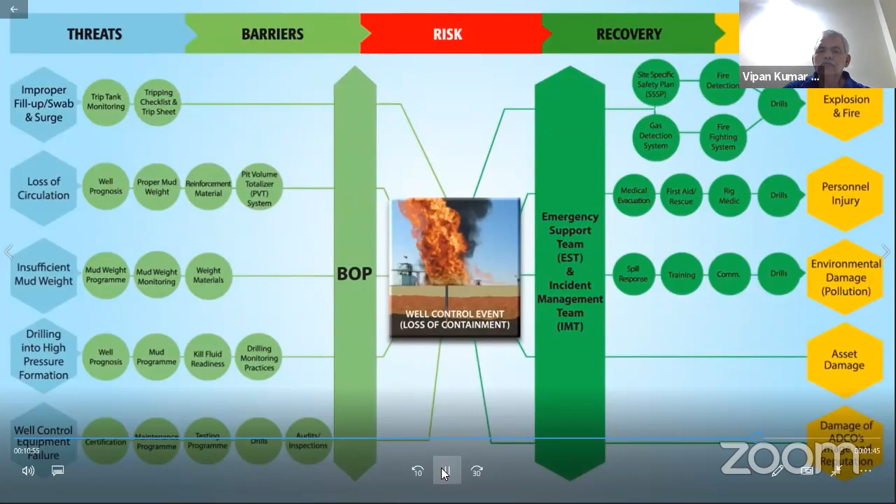Learning outcomes from such incidents include: ensure every drilling operation begins with the discussion of the top 3 concept. Always use updated reservoir pressure data for defining drilling fluid weights. Make sure that any change in the drilling plan is governed by an approved management of change process. In case of well control, shut in the well immediately as per ADCO procedures and consult your supervisor.

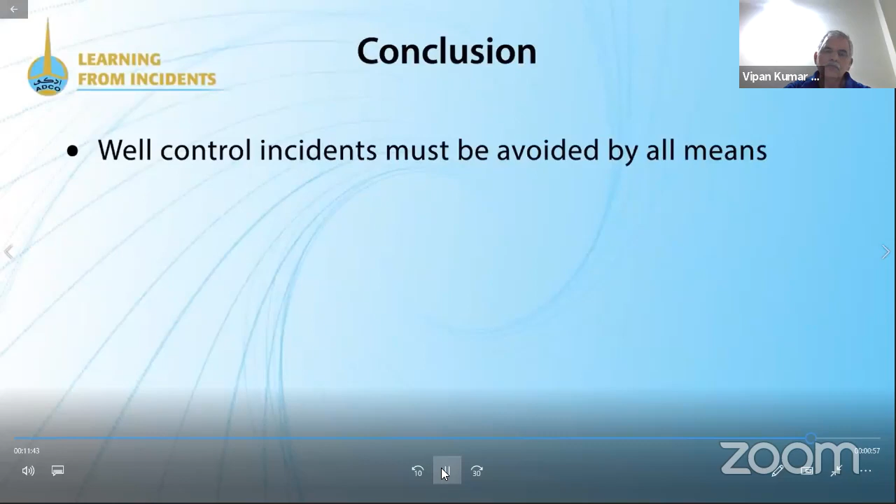In conclusion, well control incidents must be avoided by all means, as they can lead to blowouts which have catastrophic impacts. At ADCO, we expect from all the well drilling stakeholders to ensure 100% full implementation of ADCO well control integrity assurance systems. It is the responsibility of all managers and supervisors, both in the office and at the rig site, to verify and enforce the full compliance of these systems to avoid catastrophic incidents from happening.

With your continuous dedication, compliance to ADCO procedures,

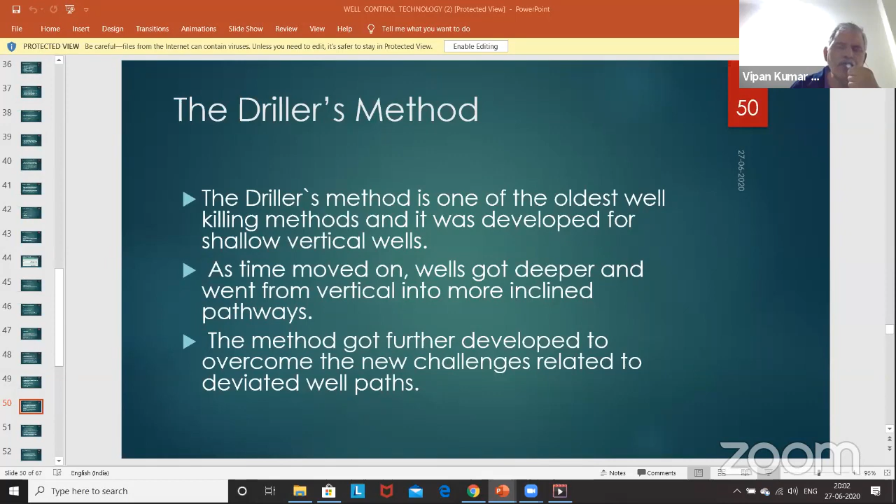Nikhil, is the PPT coming now? It's not coming, sir. It's coming, sir. Yeah, Nikhil, is the PPT coming now? Yeah, it's coming, sir. Fine, you can start, sir.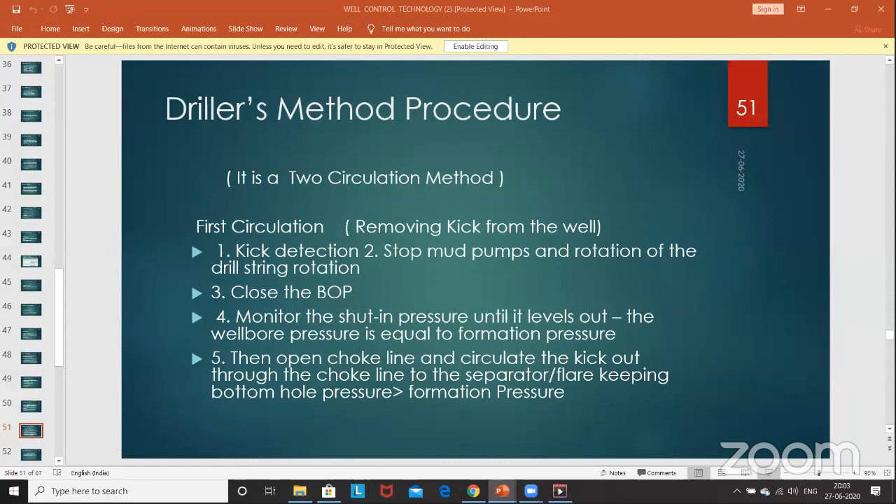So the first method is driller's method. It is a two circulation method. In this, the first step is kick detection. We detected a kick. We stop the pump, stop rotation, and close the BOP. BOP is closed. After the BOP is closed, the influx is in the well.

Our job is to take that influx out. So the cycle, our job will be to take the influx out of the well by circulating. But while doing that, we have to ensure that our bottom hole pressure is always more than formation pressure, and that we will do by manipulation of the choke. That is the trick.

So the first cycle is taking the influx which has entered the well out, and while it is being taken out, we have to ensure that the bottom hole pressure in the well should be more than the formation pressure, so that further kick doesn't come. That bottom hole pressure is kept more than formation pressure, controlled by controlling the choke. That is the first circulation.

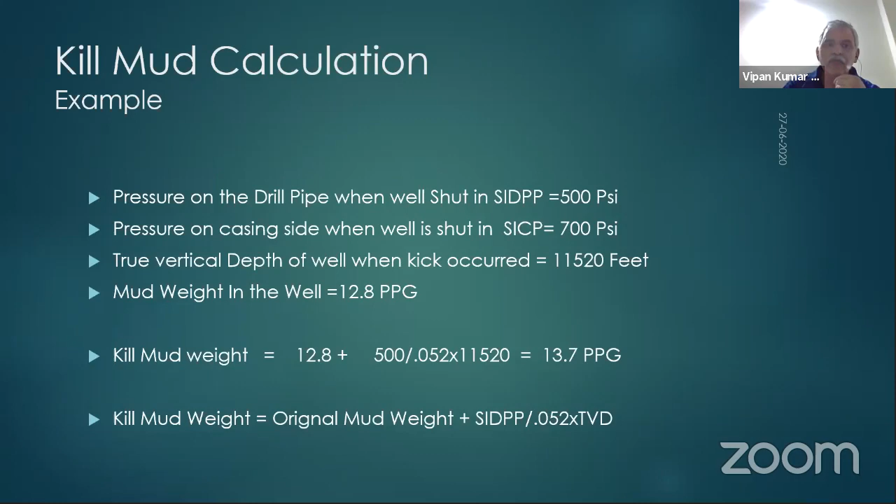In wait and weight method, it is a little one cycle method in which the influx which has entered the well will be taken out and kill mud will be pumped at the same time. While the influx is coming out, kill mud is being pumped into the well, and in one cycle only the well will be killed. This is wait and weight method.

Why wait and weight method and why driller method? Suppose we do not have sufficient - a kill mud is prepared by adding more barite into that, more weighing agents into that. Suppose I have 12.8 ppg mud in the tanks and I want to make kill mud, so I will add more weighing agents like barite and increase the mud weight. Suppose that barite is not there on the rig at that time, not sufficient barite on the rig.

Now what to do? You cannot do wait and weight method because sufficient barite is not there. So at least you can do one thing, you use driller method and take the influx out so that the well is clean. And once the well is clean and influx is out, then wait for the barite. And when barite comes, you can do the second cycle and pump the kill mud. So wait and weight, driller method can be useful.

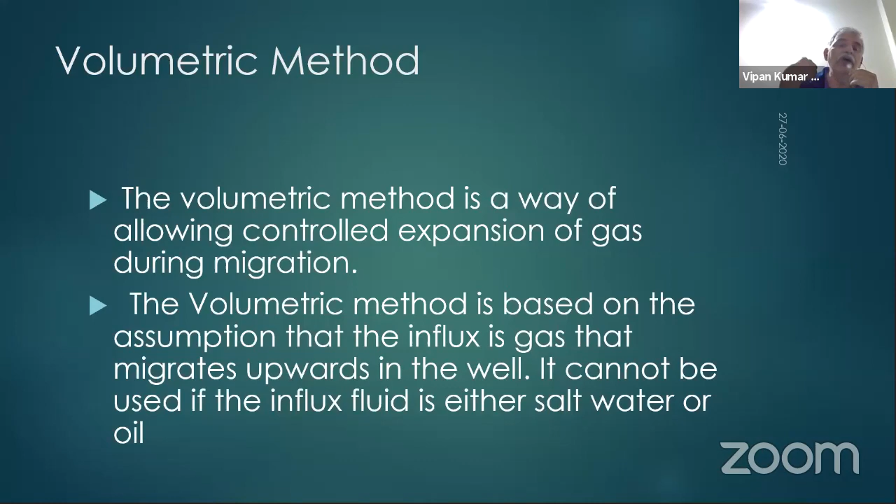So you may have to use the wait and weight method. There are times when driller's method is more useful, and there are times when wait and weight method is useful. When the drill string is out of the hole, or choked, or the pump is not working, or you are off bottom - neither down nor up, somewhere in the middle - in those conditions you can use the volumetric method. And finally, if the formations are conducive and can take the influx back into them, you can create high pressure at the pumping pressures at the top and push the influx back into the formation. I'm not going into the details of these methods.

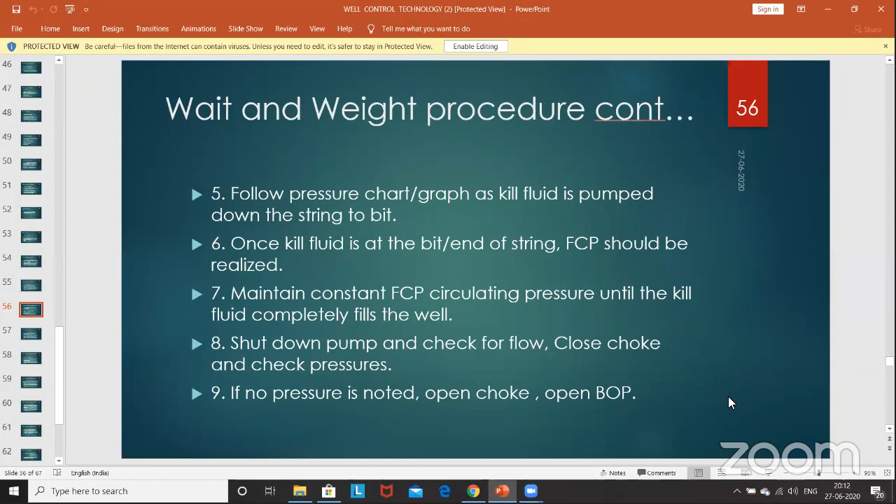Nikhil, should we try the whiteboard? Yes sir, we can try. Okay, I'll try. Nikhil, can you help me? Yes sir. Okay, just see if anybody has a question. Sir, present PPT completed. No, I can do some work on the whiteboard and explain the calculations. Okay, sir, I'm texting you in the chat box. No, one minute, is the PPT there? Yeah, PPT is coming sir. Okay, so I can show the participants.

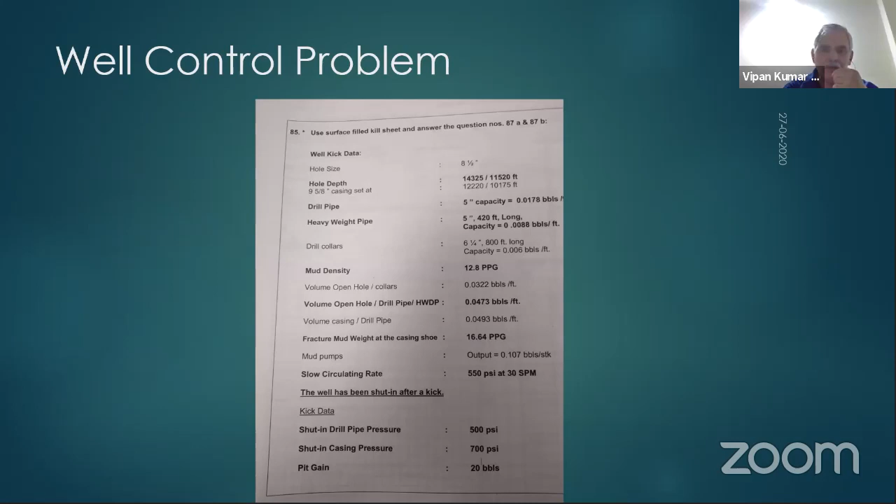This is a solved example. This is field data of a well control problem. If they can see this, they can zoom in and see what type of data is collected by drilling. Nikhil, can you do that zooming? We can zoom, sir, no problem at all.

This type of well control problem is faced in actual situations, and this type of data - like hole size, up till what depth the 9 5/8 inch casing goes, what type of drill pipe is there, what is the capacity of the drill pipe, how many heavy weights are used, how many drill collars are used in the well, what are the annular capacities, and what are the capacities of the drill collar - all that data is available to the drilling engineer to do his calculations.

Also, when the well is shut in by closing the BOP, the drilling engineer takes the shut-in drill pipe pressure. In this particular case he has taken 500 psi, and shut-in casing pressure is 700 psi, and he saw that pit gain is 20 barrels. Pit gain of 20 barrels means 20 barrels of influx has entered the well - the pit has gone up by 20 barrels. That means the influx at the bottom has entered by 20 barrels.

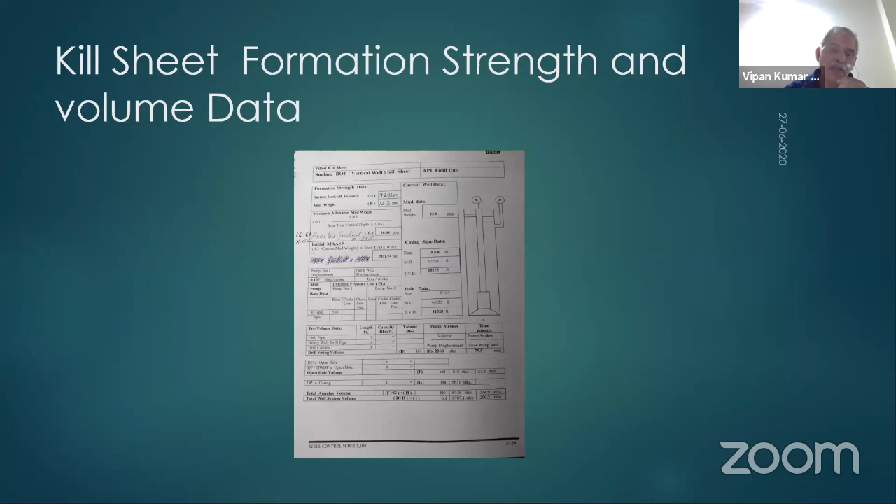The second part of the kill sheet is this. Here the drilling engineer will calculate, using a very easy formula, from the different pressures he has recorded - say 500 and 700 psi. He has calculated the kill mud weight as 13.7. So he found that 13.7 is the kill mud weight. Now he also found that he wants to use the wait and weight method. In the wait and weight method, he will be pumping the kill mud at the same time, and the influx will be coming out at the same time.

He will be pumping kill mud straight away. He has enough barite, and after shutting in the well, he did all these calculations and all the planning, and told the mud engineer to make the kill mud ready. Kill mud is ready with us, and he can start straight away. Our formations are not very strong, so the wait and weight method is a good method.

So what he will do is slowly start pumping at the kill rate, which is 30 SPM, strokes per minute. He will start pumping the kill mud into the well, and at the same time influx will be coming out of the well, right? So for doing this, he needs to follow some procedure from this kill sheet.

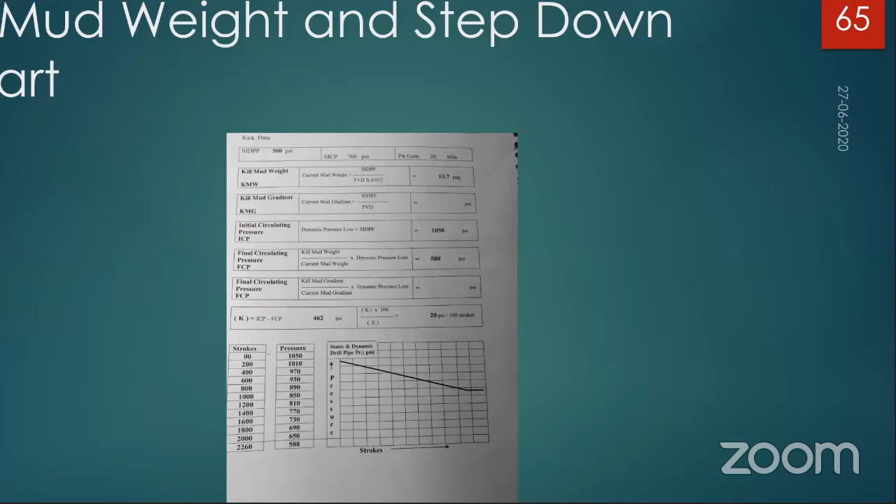Sir, as we are killing a well, we are putting a high PPG mud, but if there is a fluid loss in the well or formation damage loss due to the kick, how can you tackle this situation? And what will be our calculation at that time? Okay.

In the beginning, in the primary control there was a leak-off test. In the leak-off test, you will know how strong your formation is, right? How much you can expose your formation to, right?

And when we are killing the well, pressure should not exceed the maximum allowable pressure which our formation suggests. While killing a well, we should always be monitoring at the choke that our surface pressure should not exceed the maximum allowable surface pressure which our formation strength suggests. So that is taken into account, by monitoring that the surface pressure does not exceed the maximum allowable surface pressure. If that is maintained, you will not create a loss situation.